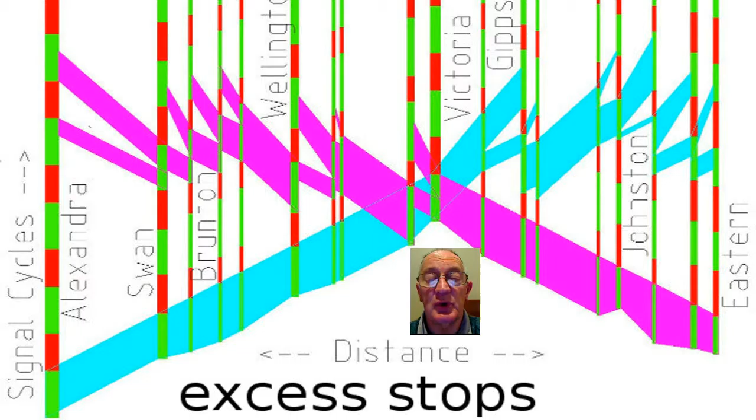If through and right are banned from Langridge Street, that is left in, left out and right in permitted, each direction in Hoddle Street can be linked without delays at Langridge Street, saving the 24 seconds from the Hoddle Street counter-peak traffic. So minor intersections must be left in, left out and right in, and pedestrian crossings staged to avoid excess stops. Traffic lanes have a capacity of about 2,000 vehicles per hour of green at signals.

This is described as 100% degree of saturation. More than 100% degree of saturation and traffic can take more than one signal cycle to pass the intersection. If one lane is reserved for buses and 3 general traffic lanes operate congested, capacity is only 6,040 vehicles per hour of green.

Less than 90% degree of saturation is described as practical capacity, 1,800 vehicles per hour of green. For a 4-lane carriageway, practical capacity is 7,200 vehicles per hour of green. Traffic is free-flowing, can readily change lanes, and the green wave, linking, can be given to traffic.

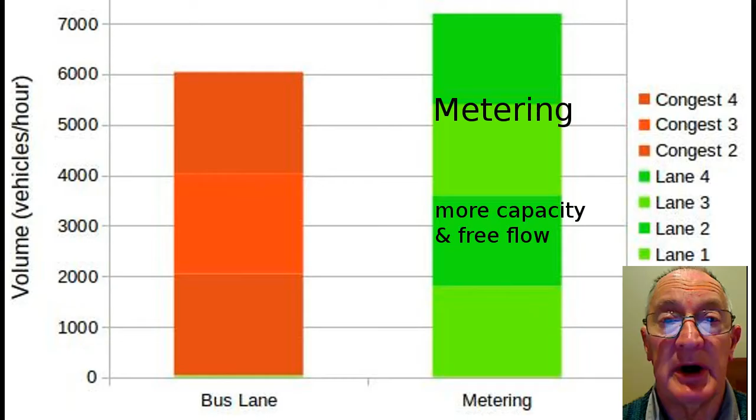So, if only 1,800 vehicles per hour of green are permitted by upstream signals, there's no need for bus lanes. Doncaster buses are better served by metering than by bus lanes, less delay at signals. Metering must be extended south of Victoria Street, and that benefits the Punt Road bus.

Bus queue jumps must be set back, that is, bus lanes terminate at one green phase queue length before the entrance to the metered length, such that buses get through on the first signal cycle, but general traffic must fully use all lanes at the stop line if capacity is to be maintained.

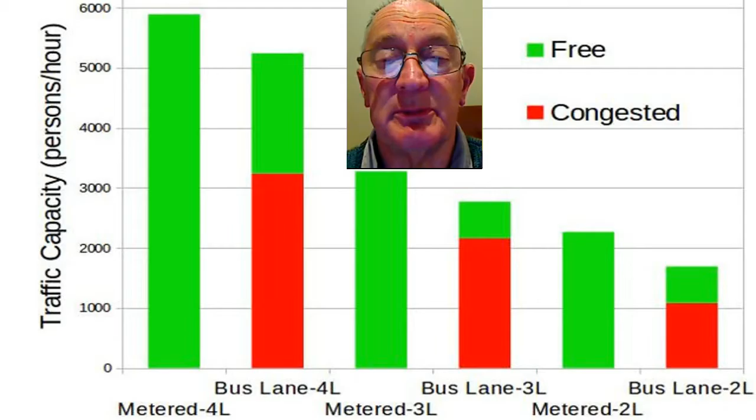New setback bus lanes must be installed on Punt Road, south of Alexandra Avenue, and on Hoddle Street, north of the Eastern Freeway. Replacing existing bus lanes by metering increases capacity by 20% and reduces travel times by 15 minutes.

If the existing capacity is increased, travel time and the total queue length for the free queue decreases, but demand increases. Metering increases capacity, reduces travel time, and so increases demand, but the queues on Hoddle Street disappear, replaced by an increase in the freeway queue.

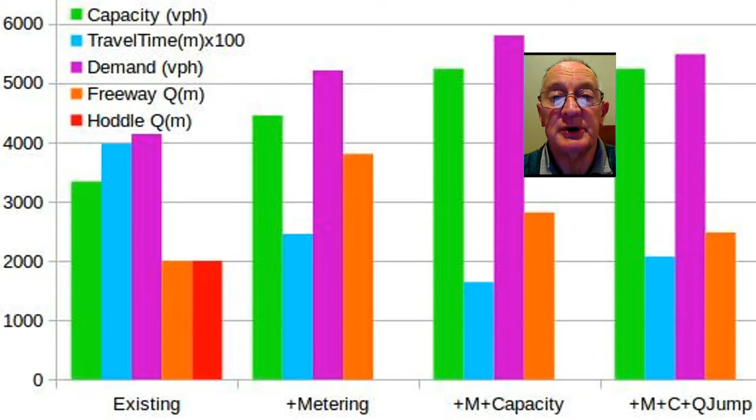If capacity is further increased by two-phase intersections, travel time is further reduced, demand further increased, and the freeway queue reduced. If queue jumping is permitted for most traffic, travel time for the free queue increases, demand decreases, but the freeway queue can be decreased by merging two lanes to one near the freeway exit.

Turn phases do not need to be at an intersection, and turns are best processed on the approaches in parallel with, that's the same time as, the cross traffic. This provides 50 to 70% more time for through traffic and 200% more time for turns at the main intersection, which is then called a two-phase intersection, or 2π.

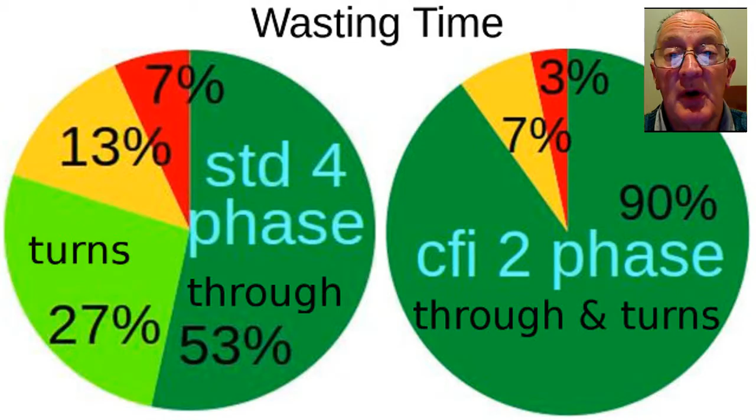2-pi reduced travel time by a further 9 minutes. 2-pi requires a treatment of right turns that can either be a continuous flow crossover on the approach, or a P-turn. These need not increase the footprint.

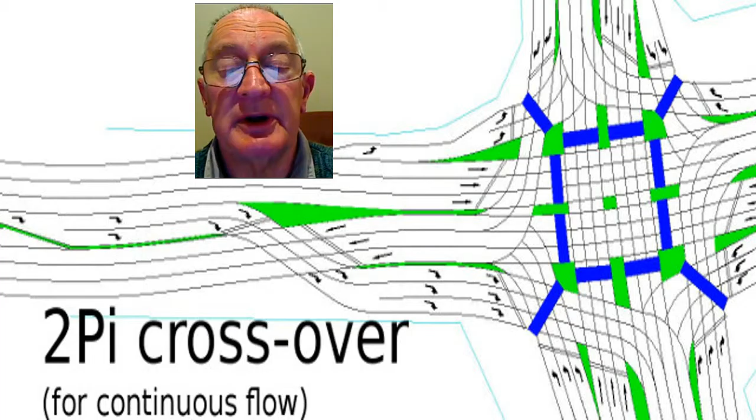A continuous flow approach, where right turns cross to a right-hand service road before the intersection, is usually most efficient because traffic only passes the intersection once. Capacity for the approach crossover should exceed the capacity at the intersection. There's always more through volume at the right turn crossover for a continuous flow intersection, because left and right turns from the crossroad are added to through volumes, so there's less time allotted to the crossover than to the cross traffic at the main intersection.

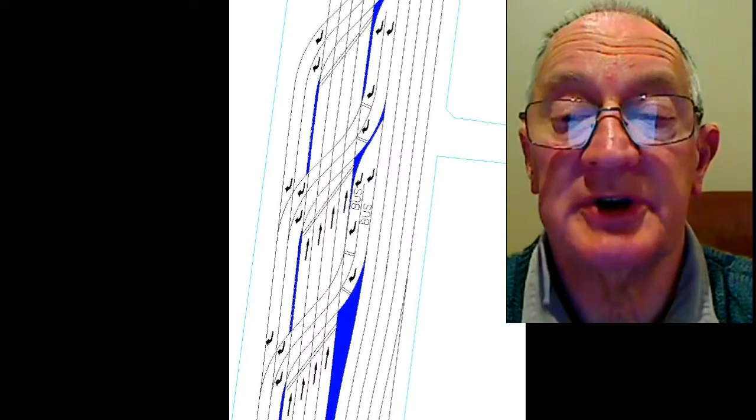Tandem or even tridem, that's multiple crossovers, are often required to keep the approach capacity higher.

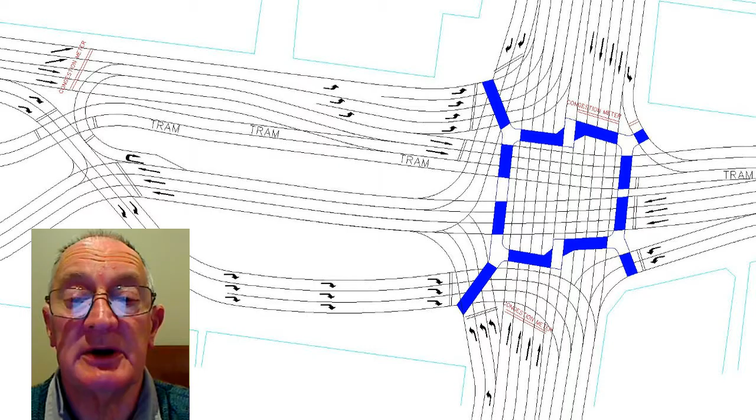At Victoria Street, Hoddle Street, the south approach is a low volume right turn, 100 plus vehicles, and it's better to use the lane as a through lane and get 1,000 plus vehicles. Also on the east Victoria Street approach, the right turn queues on the tram track, and it's better to make them go through and do a U-turn downstream. Both of these P-turns pass the intersection twice, but the capacity is improved.

The common Utah practice of having continuous left turns to their right requires an additional lane, and this is wasteful of width. Better to have another through lane for capacity.

Utah practice is also to have pedestrians separately cross right and left turns, with left turns often being continuous. This is complex for pedestrians, requires staging when turns are in separate phases, and requires crossing more lanes.

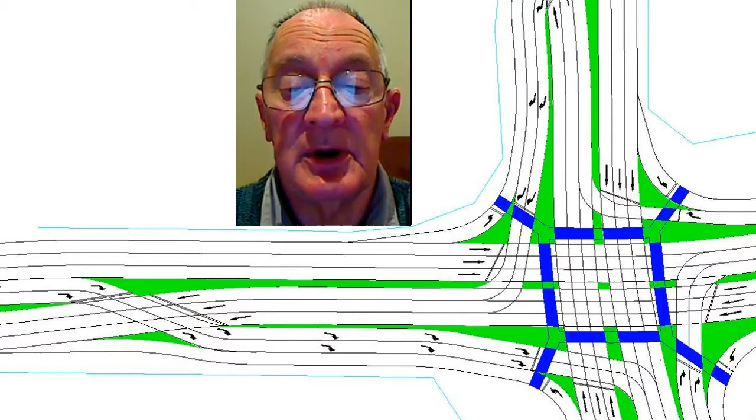Left turns must expect to stop for pedestrian safety rather than have a continuous left. Better that both left and right turns are in the same slip lane, crossing with pedestrians under full signal control.

Continuous flow intersections have right and left turners entering the same departure in the same phase. Left turn must give way to right turns so the right does not get stranded at the end of the phase, so all right turns can have an early cut-off and all left turns can have a late start.

Pedestrians cross the slip lane after the early cut-off from one approach and before the late start from the adjacent approach, without reducing capacity. A concept of stewardship must be adopted, meaning the best practical capacity is achieved given the road space available.

Each intersection must have a designed traffic load, preferably from assignments, and each option rated for the practical capacity it can provide. Existing practical capacity for Hoddle Street is only 40% of 2-pi capacity, with metering. That is simply not good enough. Only the best will do.

Smart roads is not an excuse. Given the capacity, the allocation of priority by mode and time can meet the smart roads objectives. Funding or safety is not an excuse.

Positive guidance, signing, must provide drivers with the ability to protect themselves at every hazard, since it is impractical to remove all hazards. Generous width standards should not be used at the expense of capacity. Hoddle Street, south of Victoria Street, desirably has 8 lanes to match contiguous roads.

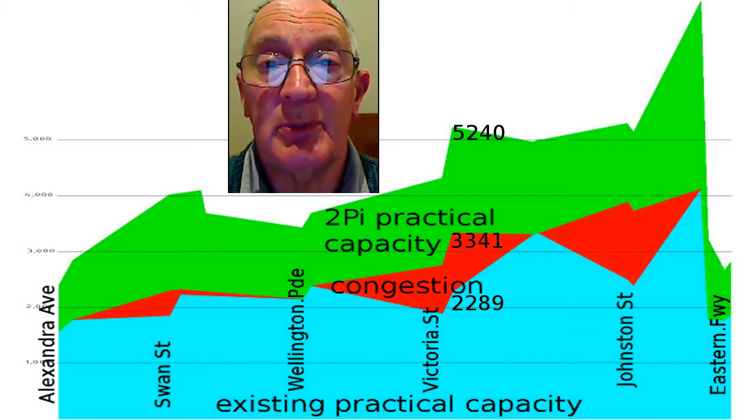Travel time on congested roads must be minimised. Metering, linking both ways, must be supplemented with queue jumping to the greatest possible extent. Low travel time targets must be set.

Most drivers overcome their aversion to tolls if they can queue jump to save 13 minutes for $1.50. One lane must be provided for those who do not wish to pay, but metering requires that they queue, although less than now.

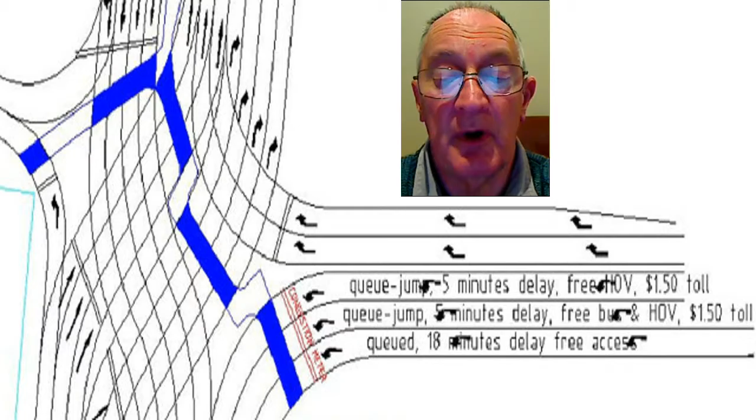Buses and high occupancy vehicles can queue jump for free. Single person vehicles will be tolled, and the toll set high enough to allow metering. Queue jumps save a further 8 minutes for tolled and high occupancy vehicles, and that travel time can be held constant with time. Only the queue time and the toll grows into the future with increased demand.

All crosswalks must permit cycling with cycle lanterns and be timed with presence detectors. It's never safe for cyclists to be on road on arterial roads. They should always have low stress off-road options. Cyclists on footpaths must be in shared zones, 10Ks. Separate networks must be configured for cycling, as bicycle boulevards like Napier Street, Fitzroy, and have underpasses of arterial.

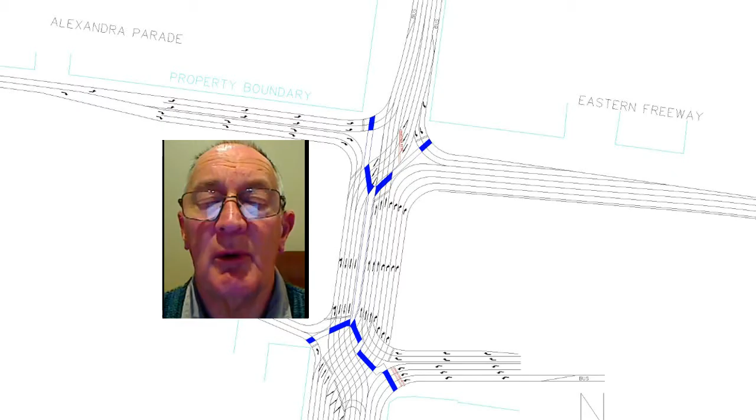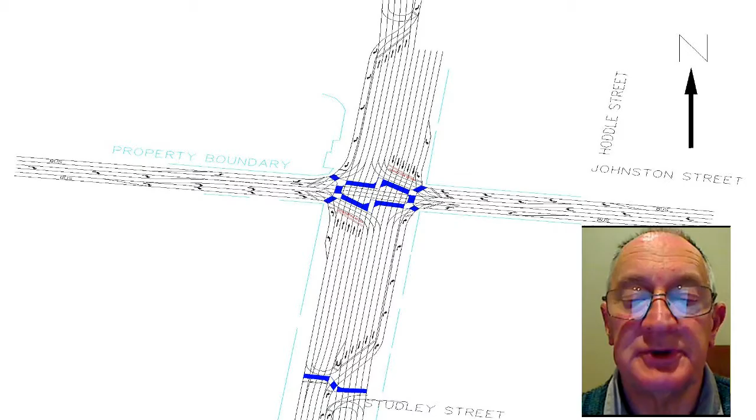Proposals are a diverging diamond with tolled queue jumping on the Eastern Freeway and a new bus lane north on Hoddle. Left in, left out and right in at Truro Street, continuous flow intersection at Johnston Street, and left in, left out and right in at Studley Street pedestrian crossing.

Continuous flow intersection at Gipps Street, and left in, left out and right in at Stanton Street pedestrian crossing. Left in, left out and right in at Langridge Street bike path and pedestrian.

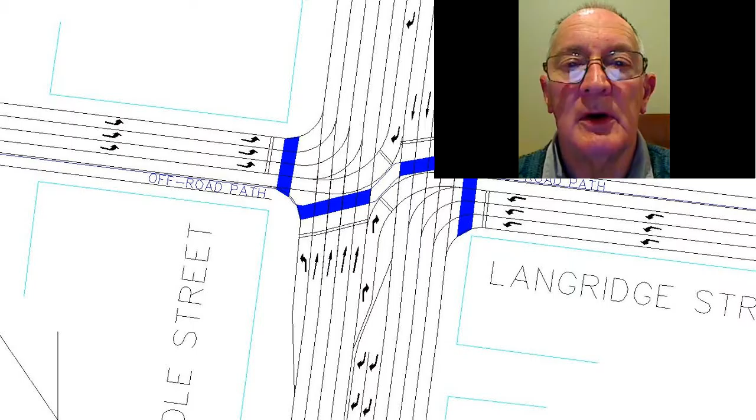2-pi intersection at Victoria Street with 2 continuous flow approaches and 2 P-turns. Bus lane setback and dual tandem crossover. Left in, left out and right in at Albert Street bike path and pedestrian crossing.

Left in, left out, right in at Hotham Street pedestrian crossing. Left in, left out and right in at Freeman Street pedestrian crossing. Continuous flow intersection at Bridge Road Wellington Parade with 2 tandem crossovers, and Wellington Parade stub not used.

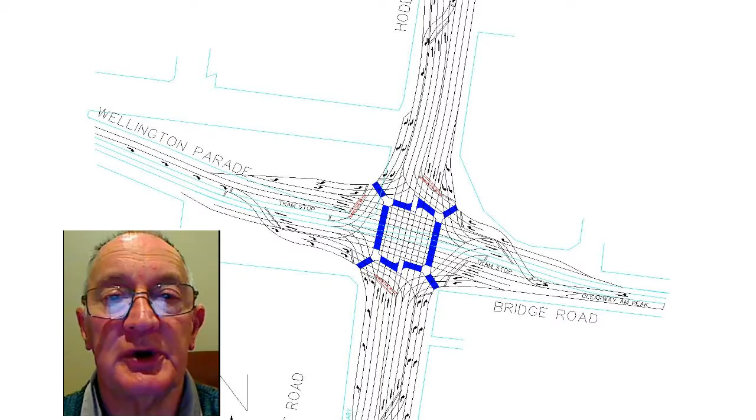Left in, left out and right in at Rowena Parade pedestrian crossing. Left in, left out and right in at Richmond Terrace pedestrian crossing. Continuous flow intersection at Brunton Avenue with new right turn from the north.

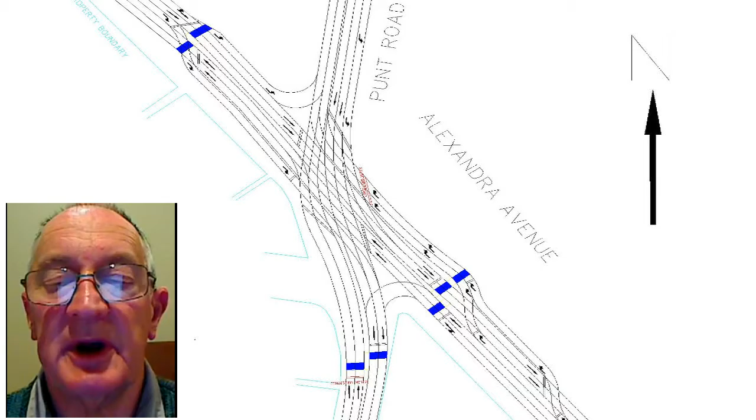A 2-pi intersection at Swan Street Olympic Boulevard with 3 continuous flow approaches and a double P-turn from the north. Continuous flow intersection at Alexandra Avenue, keeping the right turn bans from Punt Road.

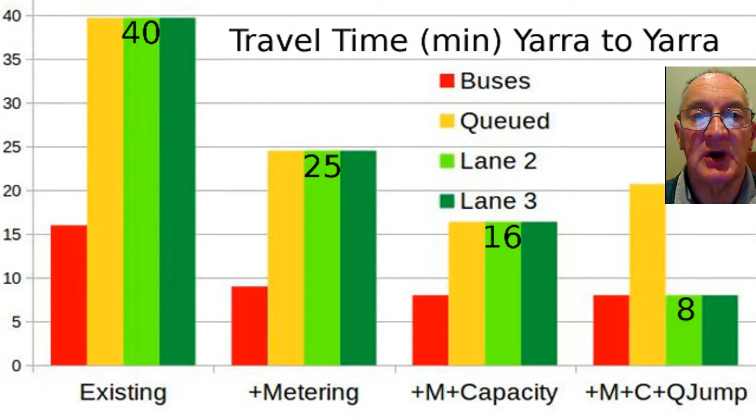For the example movement, the outcomes are: volume increases by a third, a green wave in Hoddle Street Punt Road, freeway queue increases by 500 metres, travel time reduces by 32 minutes for two-thirds of the general traffic and by 19 minutes for those who queue, Doncaster buses slightly improved, and Punt Road bus travel time reduced by 8 minutes.